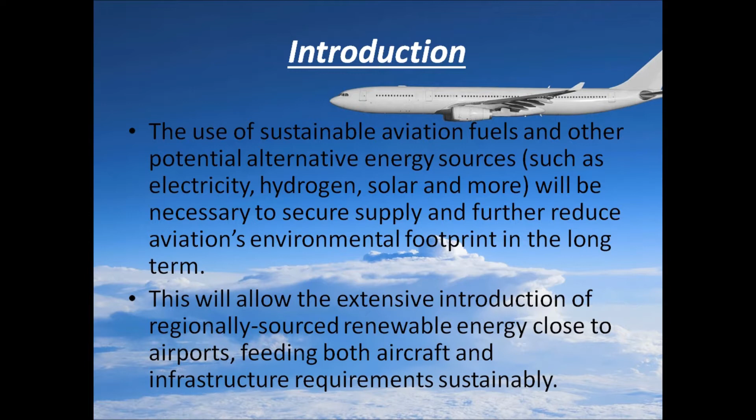A small introduction. The use of sustainable aviation fuels and other potential alternative energy sources such as electricity, hydrogen, solar will be necessary to secure supply and further reduce aviation's environmental footprint in the long term. This will allow the extensive introduction of regionally sourced renewable energy close to airports, feeding both aircraft and infrastructure requirements sustainably. Now let's look at a small video, the history of aviation with energy.

Energy has always been a major concern for aviation, not only for ecological reasons but in order to increase range and reduce cost. Since the 1960s, the commercial airlines have cut their fuel consumption by 70% and also reduced the CO2 emissions. Now that the emissions have become an issue for humanity, the aviation industry is well placed to find solutions. Already a passenger A380 uses just 3 liters per 100 kilometers per passenger, and we can always improve on something that already exists. Future generations of aircraft will save fuel up to the last drop before moving on from fossil fuels.

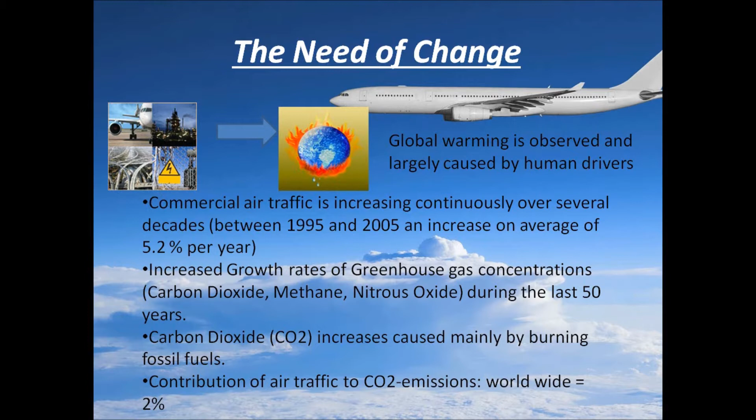The need of change. Global warming is observed, largely caused by human drivers. Commercial air traffic is increasing continuously over several decades. Between 1995 and 2005, an increase on average of 5.2% per year. Increased growth rates of greenhouse gas concentrations CO2, methane, N2O during the last 50 years. Carbon dioxide increase caused mainly by burning fossil fuels. Contribution of air traffic to CO2 emissions worldwide is 2%. Now let's look at a small video explaining about the need of change in the aviation industry.

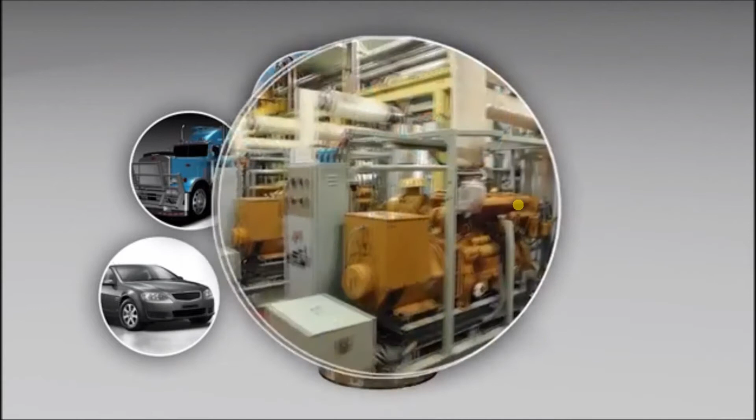The world needs transport fuels. Diesel is used in cars, trucks, heavy machinery and also ships. Diesel is also used in generating electricity in remote places and in factories. Jet fuel is used to power aircraft jet engines. Existing resources of oil and fossil fuels are rapidly decreasing. At current rate of consumption, the world uses 30 billion barrels of oil per annum. Sourcing this oil poses security and environmental challenges. As resources decrease and consumption increases, prices will continue to rise rapidly.

As we have seen in the last video, we need to change from fossil fuels to some biofuels. We need alternatives. So what should be the change? Firstly, reducing fossil fuel dependence. Like most types of transport, the aviation industry depends on fossil fuels. However, fuel supplies are becoming uncertain, more expensive, and cause environmental harm. In the last 40 years, aircraft fuel consumption and emissions have been reduced by 75% as the result of technological advances and positive steps across the aviation sector.

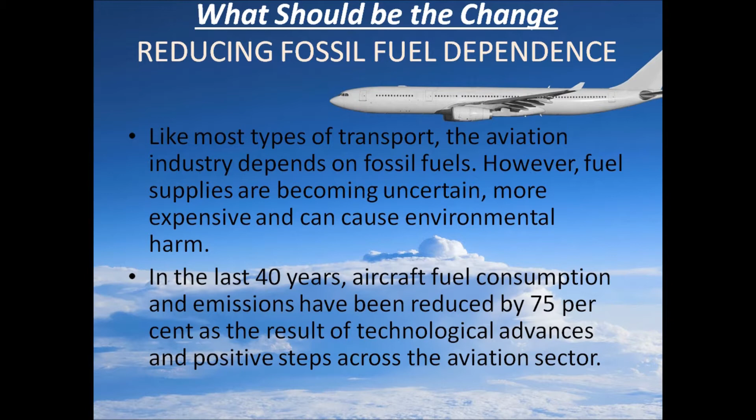Secondly, efficient fuel use. In order to meet the industry's eco-efficiency goals, aircraft manufacturers must ensure every drop of fuel is used efficiently and develop new ecologically sound alternatives. Airlines already are seeing the benefits with jetliners like the double-decker A380, which only produces about 75 grams of CO2 per passenger per kilometer, well below the current and anticipated future international limits. However, there is always room for improvement.

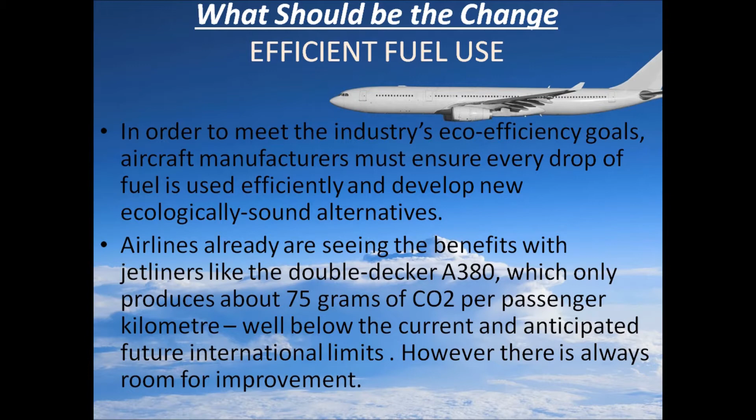Now let us see some energy systems in airplanes. Aircraft power sources. Bleed air power for cabin air conditioning and main engine start. Second, electrical power for lights and cabin entertainment. Third is hydraulic power for flight controls, for the wings to be controlled and the rudder, etc. So where does this power come from? The main power generating units on aircraft are the main engines, which are on the left and right side of the wings. They supply around 1000 kilowatts. They supply hydraulic, bleed air and electrical power for the aircraft.

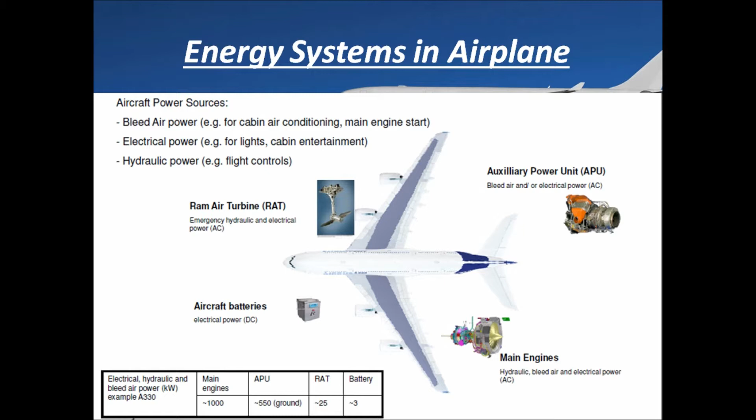The second one is the auxiliary power unit, that is APU, usually used in ground services. It provides around 550 kilowatts. The third one is the ram air turbine, RAT. It is usually used in emergencies, like emergency hydraulic and electrical power. The fourth are the aircraft batteries which supply electrical power. What are the alternative energy sources? First, hydrogen as a fuel. Second, fuel cells. Third, solar power. Fourth, alternative fuels like biofuel.

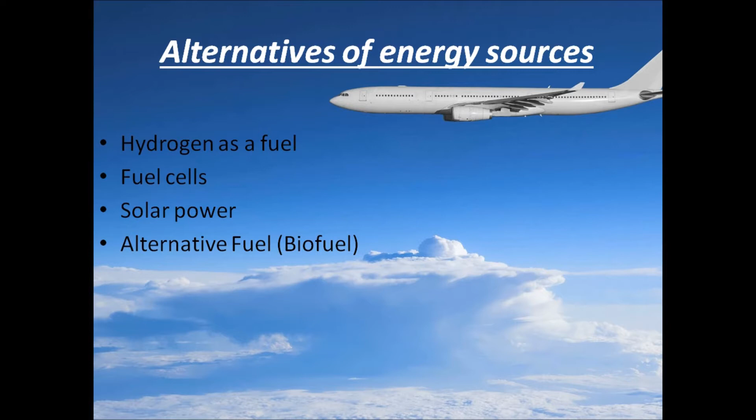Significant improvements in aircraft fuel efficiency are being achieved, 1 to 2% per year, but annual air traffic growth of 5% is leading to an increase in CO2 emissions due to air transportation. This, along with aviation's strong dependency on fossil fuels, is driving research towards development of non-carbon based fuel technologies. Within the fuel cell and hydrogen technology sector, aircraft manufacturers are investigating the potential of PEMFC and solid oxide fuel cell systems to power light aircraft or as APUs on board commercial aircraft.

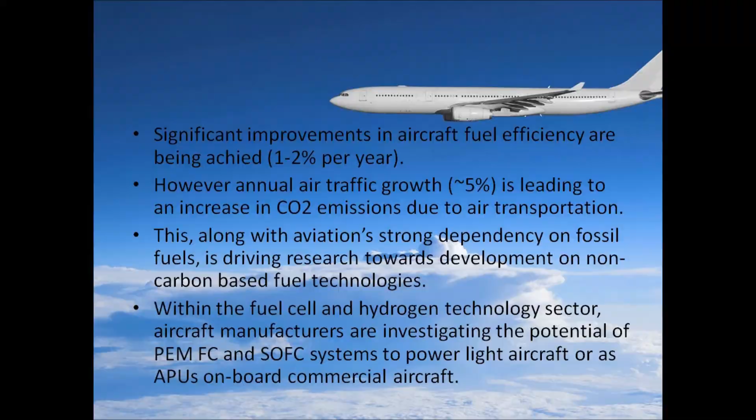Now, hydrogen as a fuel. Hydrogen as a fuel is too bulky. Also, it is not available in pure form on Earth. So a lot of energy will be required to produce it in the pure form.

It is a good option to be thought of, but not in the near future. We know that an aircraft's weight is a major factor because it flies in the air. So storing hydrogen in the fuel tank and carrying it for long distances won't be a good option to be thought of in the near future.

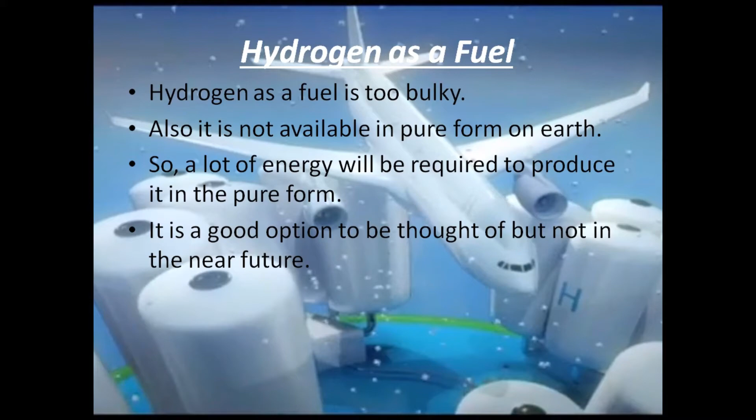The second option is fuel cells. They are really a good option. Now, what are the types of fuel cells? The commonly used fuel cells in aviation are two: PEMFC, that is polymer electrolyte membrane fuel cells, or SOFC, that is solid oxide fuel cells.

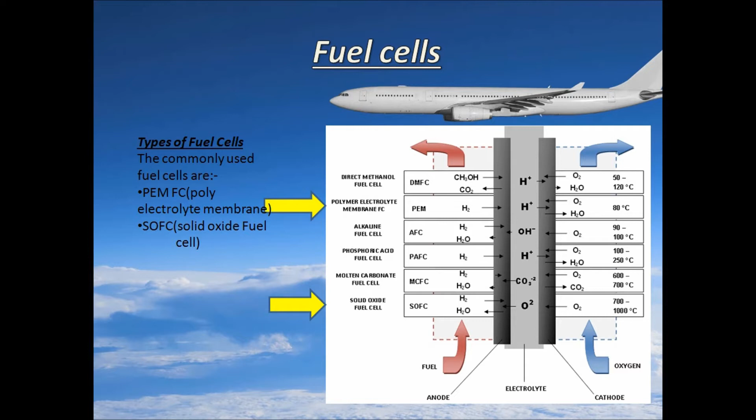How do fuel cells work? Fuel cells require hydrogen and oxygen from air. Then from a cold combustion chemical reaction they produce three things: water, inert gases and, most required, electricity.

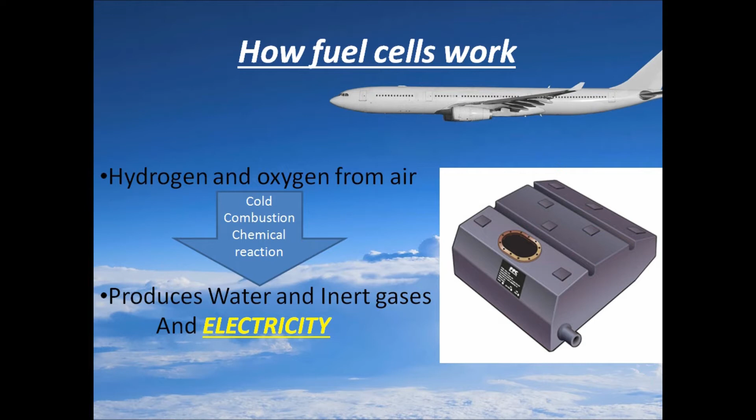Use of fuel cells in aviation. Till today, it is not possible to drive a passenger aircraft only with the help of fuel cells, but surely we can extract the use of fuel cells in small lightweight aircraft and also to power some systems in civil passenger aircraft.

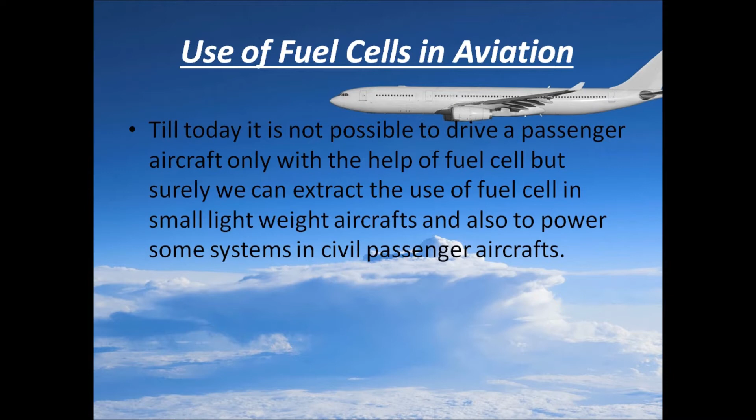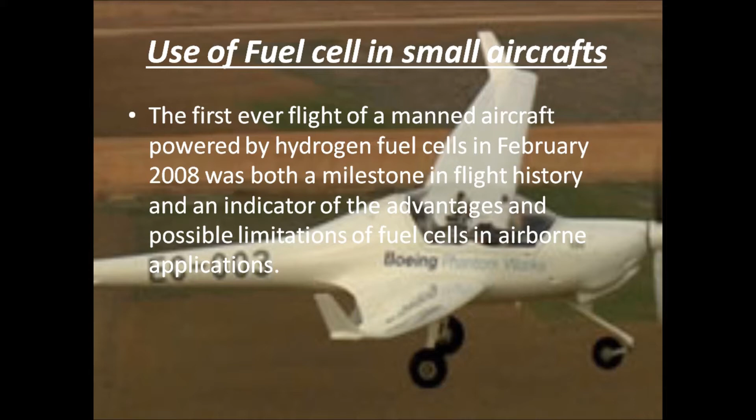Use of fuel cells in small aircraft. As you can see in the background, that is the aircraft which has been flown at 1000 metres from the ground with only the use of fuel cells. This first ever flight of a manned aircraft powered by hydrogen fuel cells in February 2008 was both a milestone in flight history and an indicator of the advantages and possible limitations of fuel cells in airborne applications.

Now let us look at a small video telling about fuel cell technology and its applications.

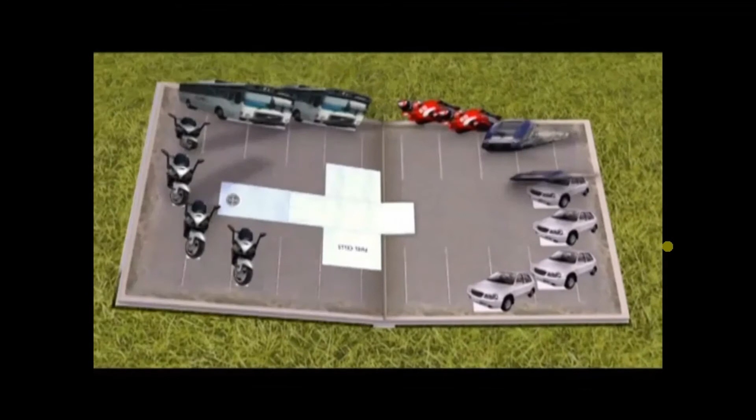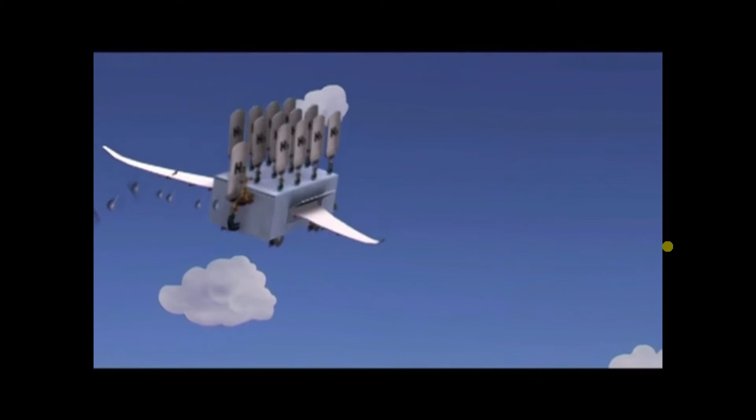Today manufacturers of various transport are interested in fuel cells using hydrogen and oxygen from the air as fuel. A fuel cell produces pure water, inert or inactive gases with no effect on the environment, and electricity. We may dream of flying a very light and silent plane, but for passenger transport we must be down to earth. The major problem here is to produce and stock the huge amount of hydrogen required to drive a fuel cell.

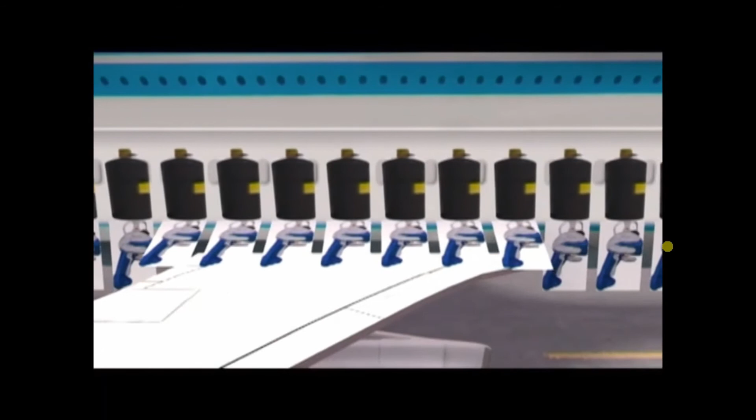But surely we can extract something else from these: fuel cells have been tested to drive the hydraulic system of a passenger aircraft and the test went extremely well. After this, what more can be done to extract the use of fuel cells?

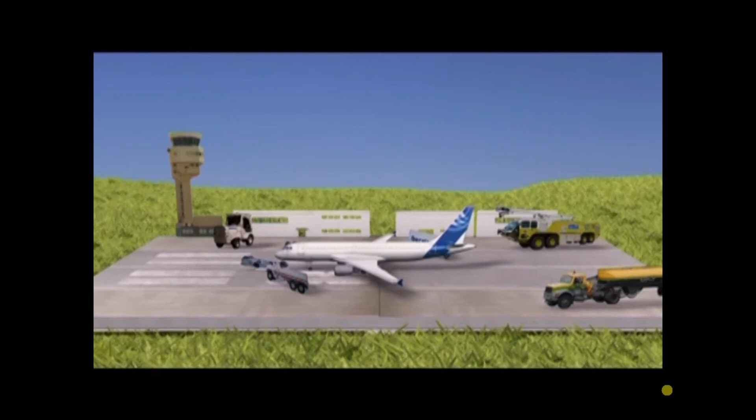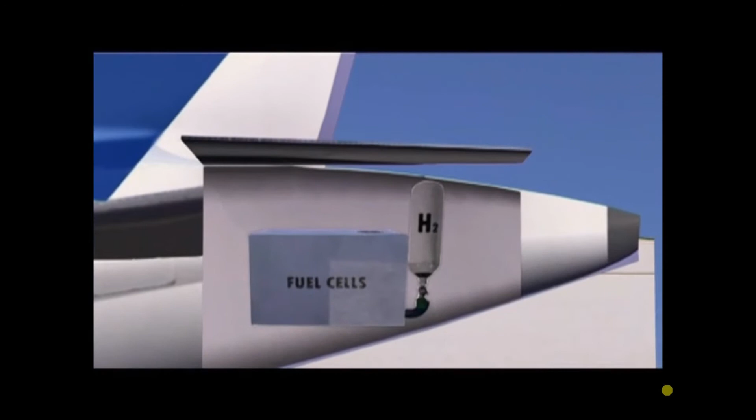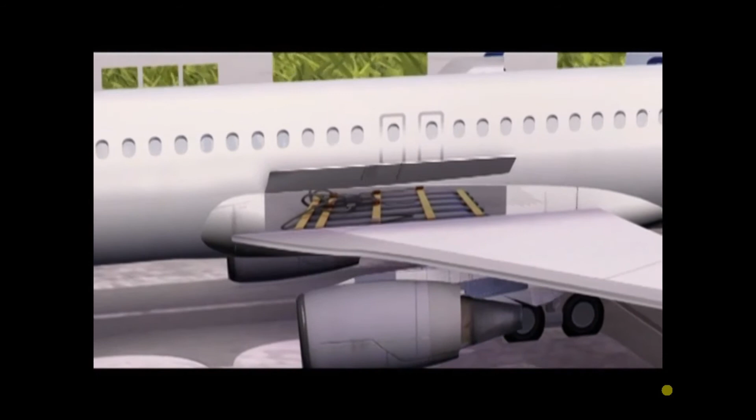We can use it to replace the APU, which uses kerosene and is used for ground operations. This will provide noiseless and emission-free energy on board. The distilled water produced will fill the onboard water tank. The inactive gases produced will be used in fire protection systems in the engines. Ground operation will also be quicker, easier and cleaner. And we also won't need ground generators and water tankers on the ground.

Now let's see one by one the multifunctional uses of fuel cells. First, power provision in the APU, emission-free ground operation. We can also use it for autonomous taxiing, that is for taxiing on the runways. Maintenance bus supply, cargo reloading, electrical main engine start, EECS supply on ground, water generation, that is potable water and

water for toilets and lavatories, heat generation, that is icing prevention or de-icing on the wings, explosion and fire prevention with the help of the inert gases produced by the fuel cells, suppression, inerting of tanks, cargo and e-bay compartment. We can also use it as an electrical wheel drive to drive the nose wheel used in big airplanes.

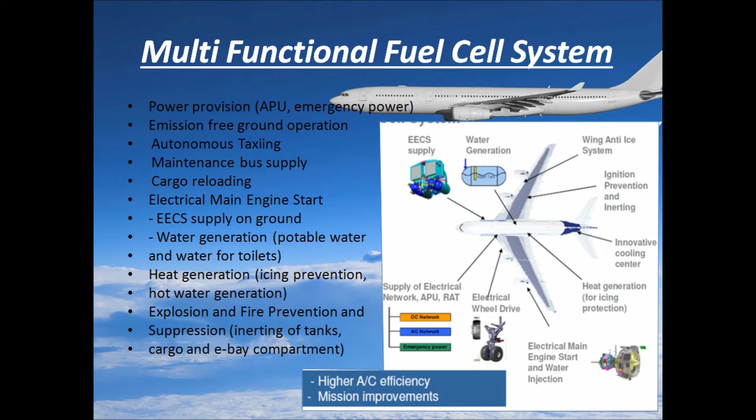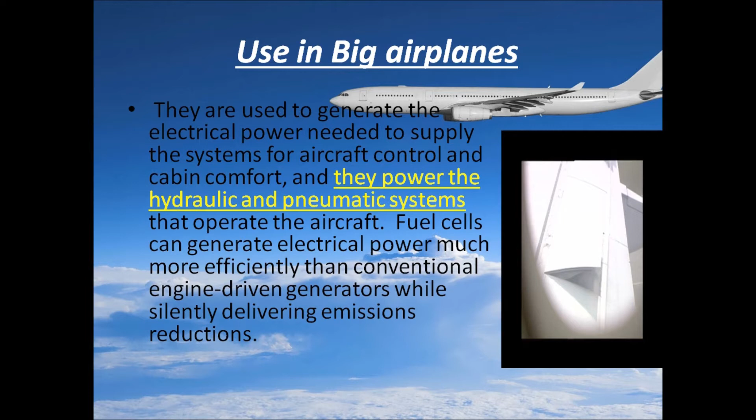As seen in the video, they are used to generate the electrical power needed to supply the systems of aircraft control and cabin comfort, and they power the hydraulic and pneumatic systems that operate the aircraft. Fuel cells can generate electrical power much more efficiently than conventional engine-driven generators.

One of the greatest advantages of using a fuel cell is that the water produced after the reaction can be used in the galleys and lavatories of the aircraft. That reduces the water to be carried during the initial takeoff.

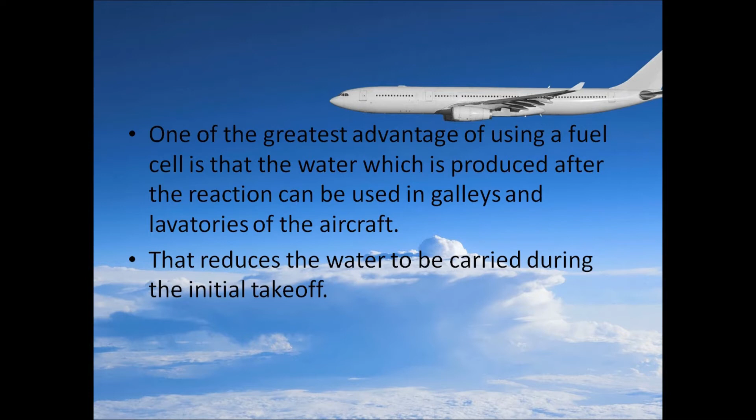Now what are the barriers and drivers for fuel cells? Drivers: they reduce emissions, have quiet operation, low infrared, good for surveillance in UAVs, improved fuel efficiency, weight reduction, and the byproducts produced can be used efficiently, that is water, heat and inert gases.

Now what are the barriers? Technology needs to be proven. Still a lot of research will be needed to prove the technology. Hydrogen infrastructure, that is how to store the hydrogen, how to produce it, how to stock it in the aircraft, is a big barrier. And the third and most important is the high initial cost, which will be a barrier for many aviation companies to install it at the start.

The aircraft industry will not be an early adopter of fuel cell technology. However, given the interest in the technology displayed by two of the world's major aircraft manufacturers, it is likely that fuel cells will appear in aircraft in the future. The most likely applications are hybrid fuel cell APU systems for commercial aircraft, with products appearing around 2020, and specialized military applications for surveillance like in UAVs.

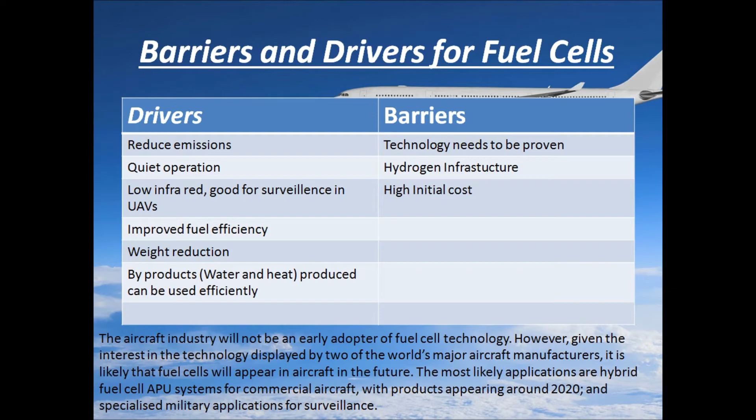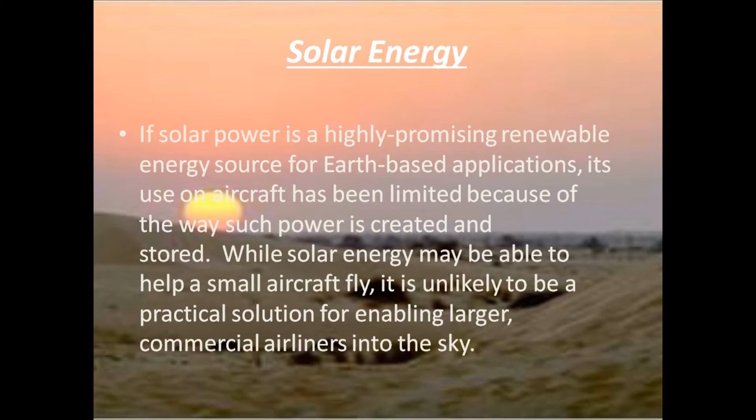Now, how much power can be generated with the help of solar energy? Power is energy upon time, which comes out to be weight upon glide ratio into speed. Weight is, we know, in terms of tons, speed is the average speed of the aircraft, and glide ratio is, when the airplane's engines are stopped, how much it comes vertically down with respect to the horizontal distance covered by it.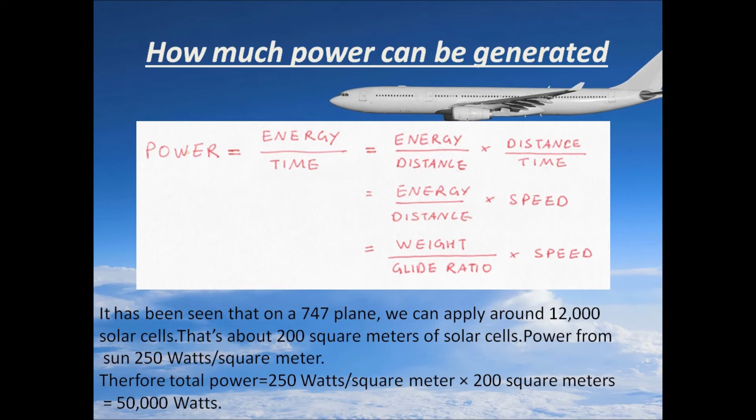It has been seen that on a 747 plane we can apply around 12,000 solar cells on its wings. That's about 200 square meters of solar cells. Power from the sun is 250 watts per square meter. Therefore, total power which can be attained on a 747 plane comes out to be 50,000 watts.

The best commercially available solar cells are about 20% efficient at capturing solar power, and then there are further losses in the batteries and the electrical motors, so total efficiency comes down to 12% only. So the power obtained is 6000 watts. A 747 has a glide ratio of around 12.

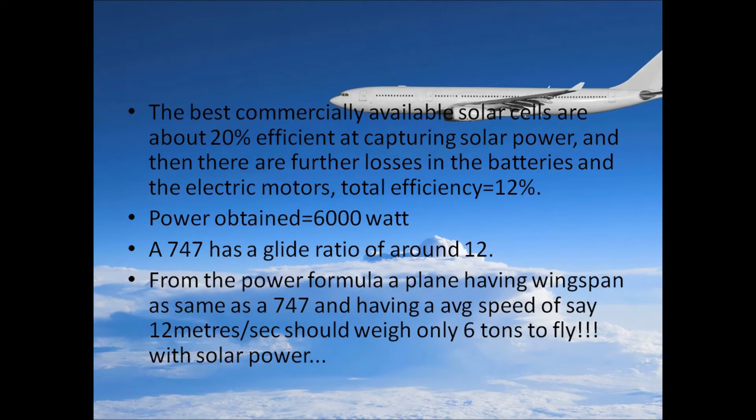From the power formula, a plane having the same wingspan as a 747 and an average speed of, say, 12 meters per second should weigh only 6 tons to fly with solar power. 6 tons is a very small weight, so it is not feasible to apply solar cells and fly a commercial civil passenger airline plane, but we can use it for something else.

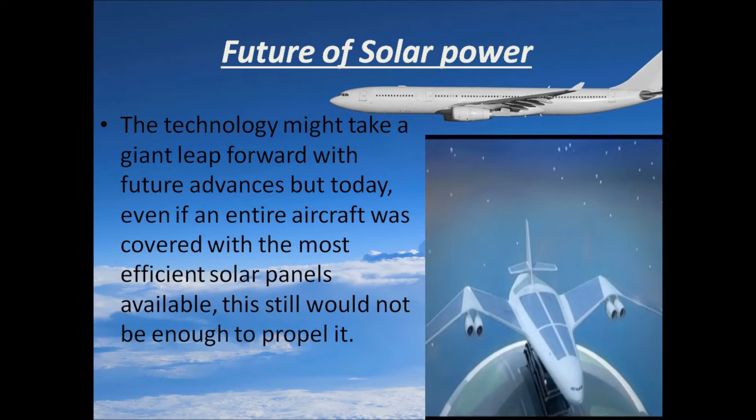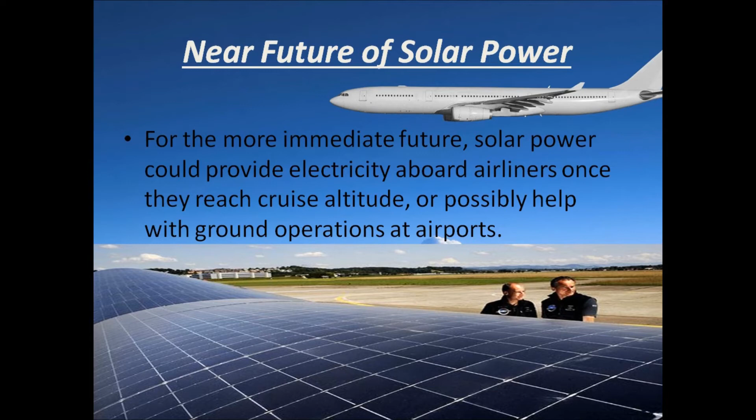So what is the future of solar power? The technology might take a giant leap forward with future advances, but today, even if an entire aircraft was covered with the most efficient solar panels available, this still would not be enough to propel it, but it can be used for something else. For the more immediate future, solar power could provide electricity on board airliners once they reach cruising altitude, or possibly help with ground operations at airports.

Let's look at the fourth alternative, that is alternative fuels. It is one of the most important, since everyone is concerned about reducing fuel consumption. Now, the industry is exploring reliable alternatives to conventional jet fuel that are sustainable and have a smaller carbon footprint.

Now, what are the main requirements for sustainable alternative jet fuels? Firstly, it should be able to mix with conventional jet fuel, use the same supply infrastructure and not require adaptation of aircraft or engines. That is, it should not require changing the engine infrastructure, etc. It should meet the same specification as conventional jet fuel, in particular resistance to cold and high energy content.

It should meet sustainability criteria such as life cycle carbon reductions, limited fresh water requirements, no competition with food production, and no deforestation. Automotive bioethanol and biodiesel are not suitable for jet fuel.

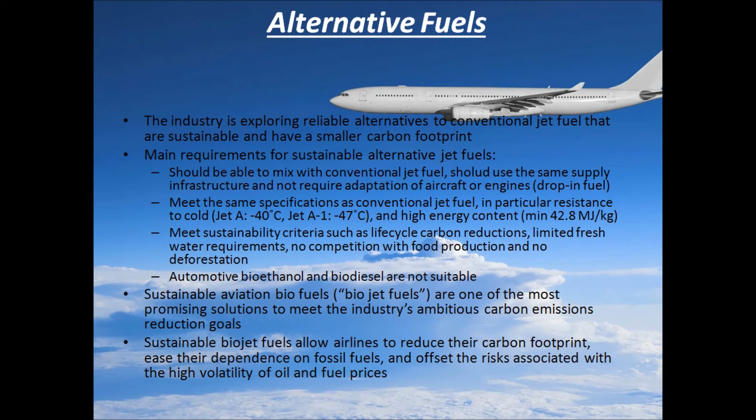Sustainable aviation biofuels are one of the most promising solutions to meet the industry's ambitious carbon emissions reduction goals. Sustainable biojet fuels also allow airlines to reduce their carbon footprint, ease their dependence on fossil fuel, and offset the risk associated with high volatility of oil and fuel prices.

Sustainable sources of biomass. Now, what are the sources? Biofuels should only be made from sustainable non-food biomass sources. Some examples include camelina, an energy crop that grows in rotation with wheat and other cereal crops. Halophytes thrive in salty regions where little else grows. Jatropha can be grown on degraded lands and is resistant to drought. Switchgrass grows quickly, needs little water and produces a high yield of biomass.

Used cooking oil can be easily collected and recycled. Agricultural and forestry byproducts yield valuable biomass without requiring dedicated land. Municipal waste contains biomass and can be diverted from landfills. Now, the most important, algae. Algae are simple photosynthetic organisms. They can be grown in polluted or salt water, and can produce up to 250 times more oil per unit area than soybeans.

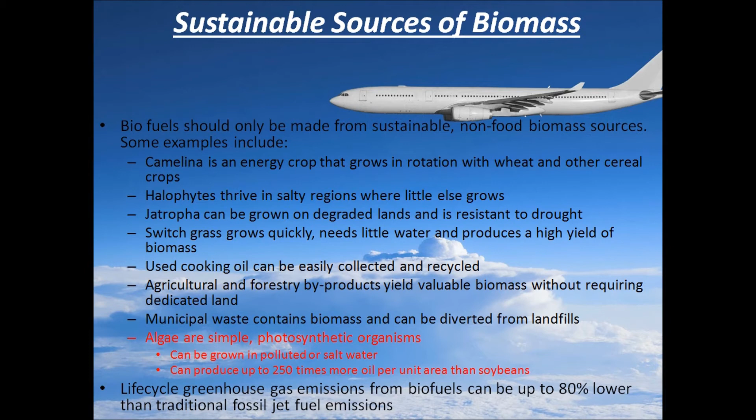The value chain is the whole process from selecting a feedstock to the burning of the fuel in the aircraft. First, we need to select the feedstock according to the requirement and the area where we want to grow it. Then the feedstock growth. It will be grown on land or in water, whatever is feasible. Then the harvesting of the feedstock. Then the feedstock needs to be transported to an area where it would be refined and converted into biofuel.

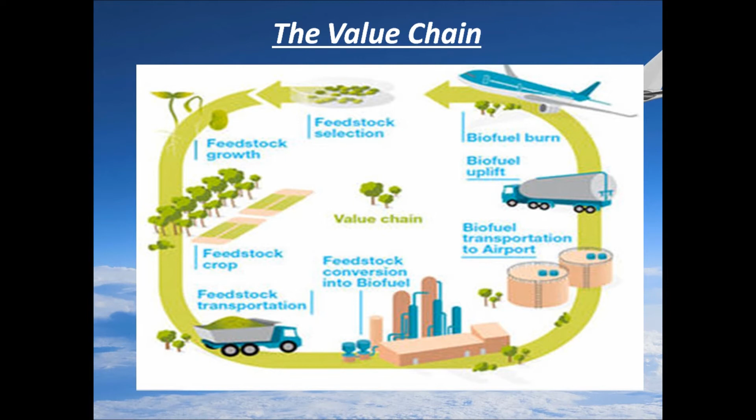This biofuel produced will be taken to the nearby airport to store and stock it. Then from the airport we need to fill the biofuel in the tankers, and this biofuel will be filled in the tanks of the aircraft, and it will be used to produce power.

Now let us see, if we use algae as a feedstock, what are the requisites for producing biomass from algae? Firstly, the sun, CO2, nutrients. With these, algae produce biomass.

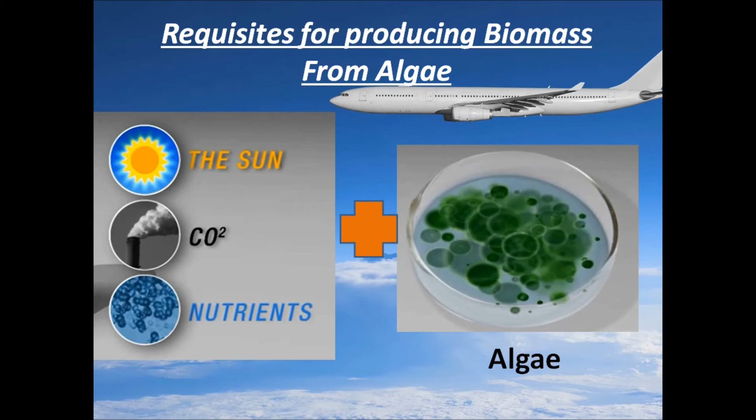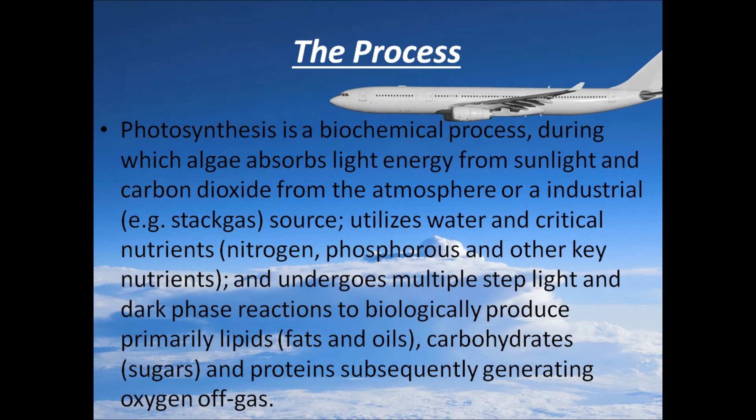The process. Photosynthesis is a biochemical process during which algae absorbs light energy from sunlight and carbon dioxide from the atmosphere or an industrial source, utilizes water and critical nutrients like nitrogen and phosphorus, and undergoes multiple step light and dark phase reactions to biologically produce primarily lipids, fats and oils, carbohydrates and proteins, subsequently generating oxygen off gas.

Algae production basically includes the sourcing of carbon dioxide, water, nutrients and light energy to a photosynthesis system for conversion to algae of a specific composition. Carbon dioxide source. There are a number of potential carbon dioxide stack gas sources with high CO2 concentration preferable for algae production, including power plants and energy intensive manufacturing facilities.

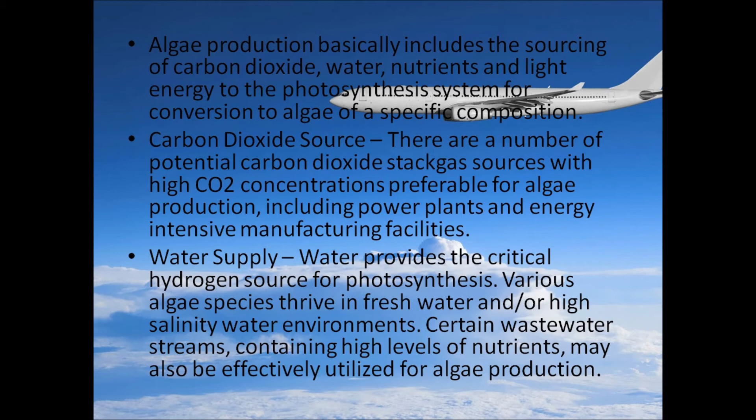Water supply. Water provides the critical hydrogen source for photosynthesis. Various algae species thrive in freshwater or high salinity water environments. Certain wastewater streams containing high levels of nutrients may also be effectively utilized for algae production. Nutrient source. The primary nutrients required for the photosynthesis include nitrogen and phosphorus, sourced from conventional nitrogen phosphorus fertilizers.

Light energy. Sunlight provides the main energy source for conversion of CO2 and water into algae, generally 70 to 85% of the total energy requirements. Only the visible light portion of sunlight is useful for algae production, and more specifically, certain wavelengths are more efficiently absorbed.

Now the algae composition. The composition of the algae product is highly dependent on the specific species utilized and the photosynthesis operating conditions employed. Algae products contain from 45% up to 80% carbon content in the form of lipids or oils, carbohydrates, proteins, and hydrocarbons. Now let us look at a video telling about the production of algae and the process of making biojet fuels.

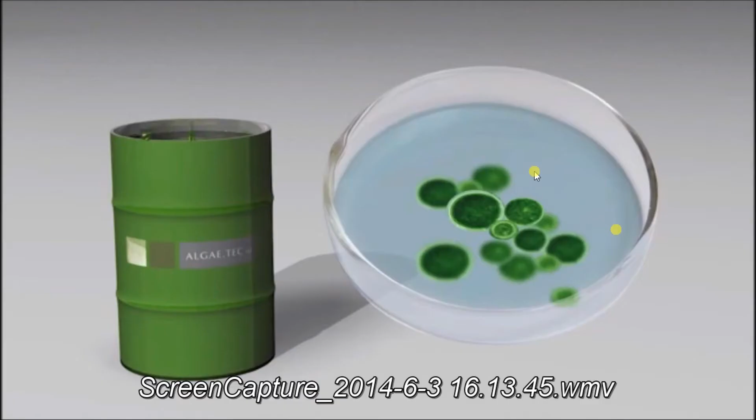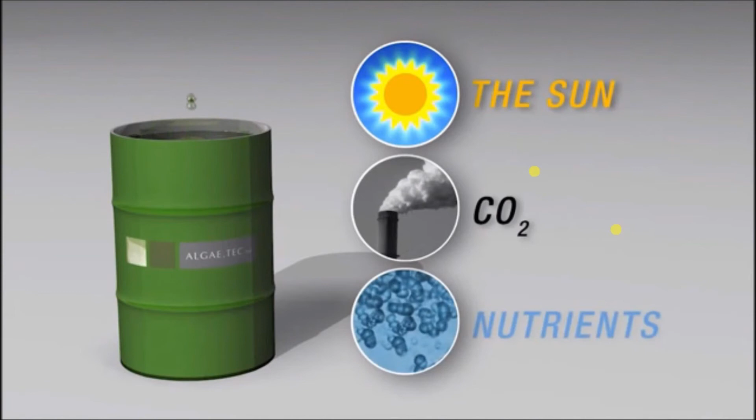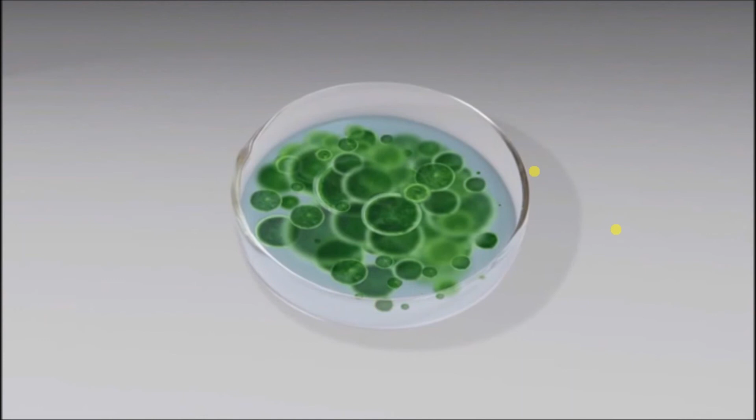An alternative viable source of oil is from an industrial scale high yield growth system using algae. Algae uses the sun, carbon dioxide and nutrients to grow. In a controlled environment, algae can multiply many times each day. Selected algae can produce 50% oil and 50% biomass, which converts to fuel products. This makes algae one of the world's valuable, renewable, and sustainable fuel resources.

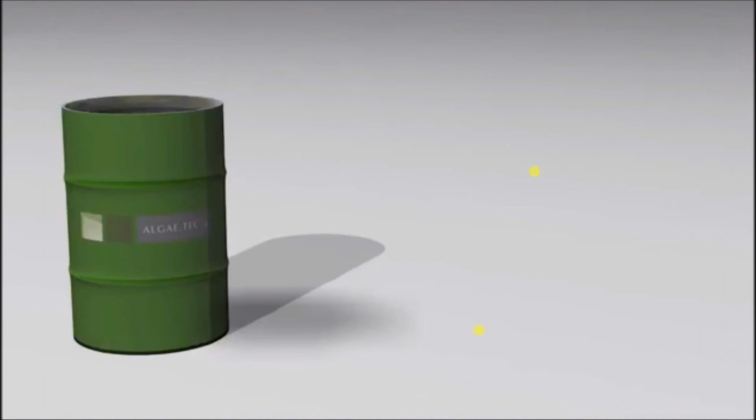A look inside the technology shows how light, carbon dioxide, and nutrients deliver a powerful algae growth mix in controlled and closed photobioreactors. The resulting algae is made up of valuable oil, sugar, proteins, and biomass. The algae is separated into oil and biomass. The products are separated to produce biodiesel, jet fuel, and ethanol.

And the alternative fuels in practice which have been used and tested. Between 2008 and 2011, at least 10 airlines and several aircraft manufacturers performed flight tests with various blends containing up to 50% biojet fuel, and the remaining 50% was the original jet fuel which is used in the daily process. These tests demonstrated that biojet fuel was technically sound, and the following observations were made.

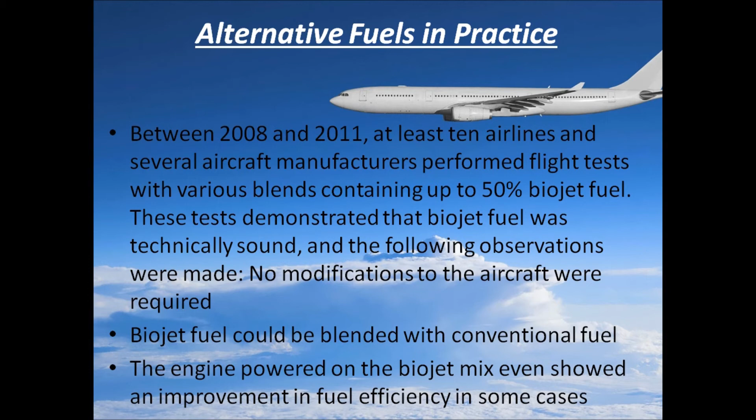No modification to the aircraft was required. Biojet fuel could be blended with conventional fuel. The engine powered on the biojet mix even showed an improvement in fuel efficiency in some cases. The production and impact on net emissions.

The main challenges to a wide deployment of biojet fuels are not technical but commercial and political. Currently, biojet fuels are significantly more expensive than Jet A or A1. Therefore, demand is low and risk is high for investment in production infrastructure. Carefully designed policy is needed to foster investment and development of biojet production capacity.

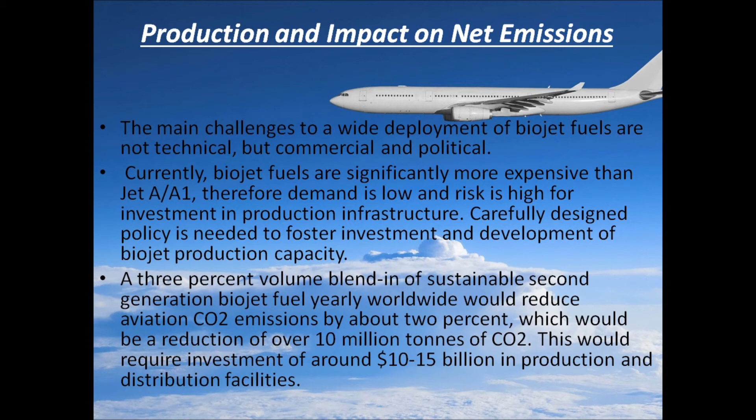A 3% volume blend in of sustainable second generation biojet fuel yearly worldwide would reduce aviation CO2 emissions by about 2%, which would be a reduction of over 10 million tons of CO2. This would require investment of around 10 to 15 billion in production and distribution facilities. The 5 easy steps to growing a viable aviation biofuel industry.

Many of the technical hurdles facing aviation in its move towards sustainable aviation biofuel have now been overcome, and most of this work has been achieved within the industry. Now commercialization and scaling up of the supply of aviation biofuel is the most important task. Now this all has to be done by government. The role of government in these five steps: first step, foster research into new feedstock sources and refining processes.

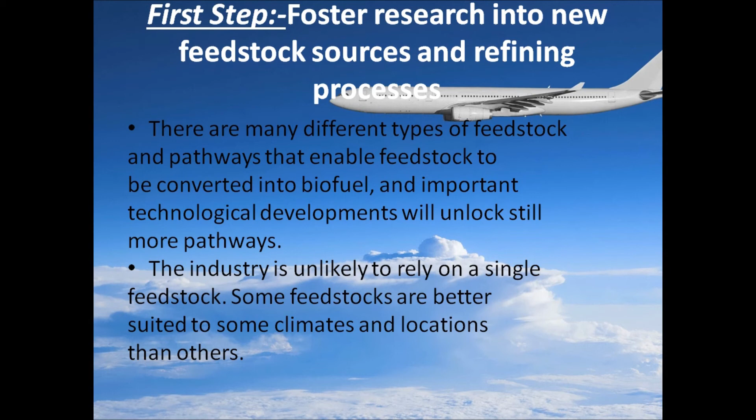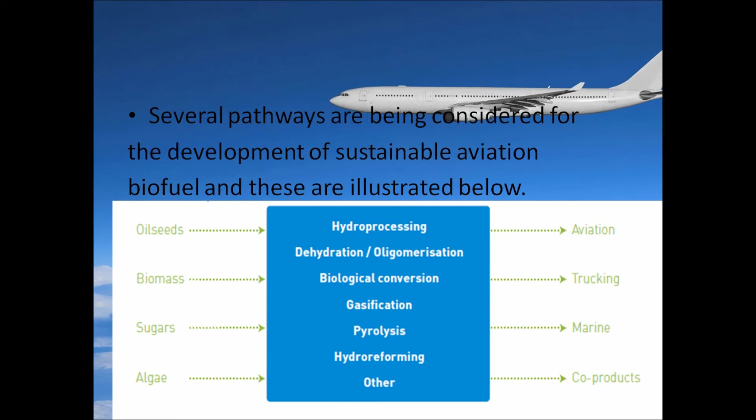That is, new feedstock sources need to be developed. There are many different types of feedstocks and pathways that enable feedstock to be converted into biofuel, and important technological developments will unlock still more pathways. The industry is unlikely to rely on a single feedstock. Some feedstocks are better suited to some climates and locations than others. Several pathways are being considered for the development of sustainable aviation biofuel, and these are illustrated below. Here below are shown some pathways which can be used to select the feedstock.

The second step, de-risk public and private investments in aviation biofuels. These incremental upfront capital investment costs are a potential barrier to commercialization. In this context, governments can play a role in reducing this risk through measures such as loan guarantees, tax incentives, grants, and co-financing for pilot and demonstration projects. They can also provide a level playing field with biodiesel by providing similar fiscal and price incentives in order to catalyze establishment of the sector.

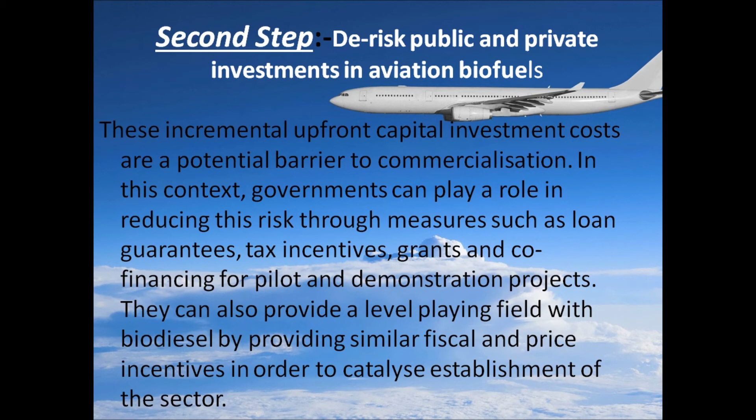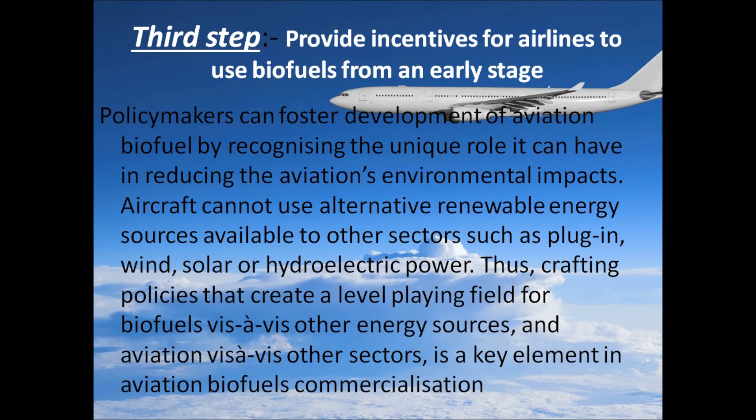Third step, provide incentives for airlines to use biofuels from an early stage. Policymakers can foster development of aviation biofuel by recognizing the unique role it can have in reducing aviation's environmental impacts. Aircraft cannot use alternative renewable energy sources available to other sectors such as plug-in wind, solar or hydroelectric power. Thus, crafting policies that create a level playing field for biofuels with other energy sources, and aviation with other sectors, is a key element in aviation biofuel commercialization.

Fourth step, encourage stakeholders to commit to robust international sustainability criteria. The development of an accepted set of globally harmonized standards will help ensure that investment is directed at biofuels that meet acceptable sustainability criteria, thus minimizing this form of risk.

Criteria need to be mutually recognized around the world. For aviation, global standards are needed wherever possible, due to operational routing of aircraft, common ground equipment, and worldwide fuel purchasing requirements.

Fifth step, establish coalitions encompassing all parts of the supply chain. Those seeking to better understand potentials for this industry should engage with the process identified in this publication to understand next steps in each region.

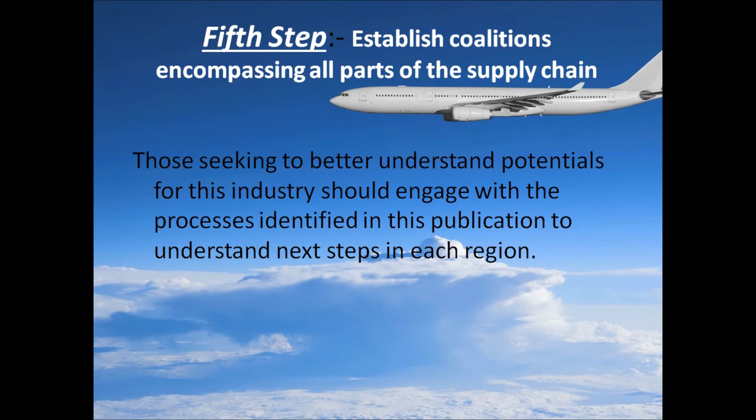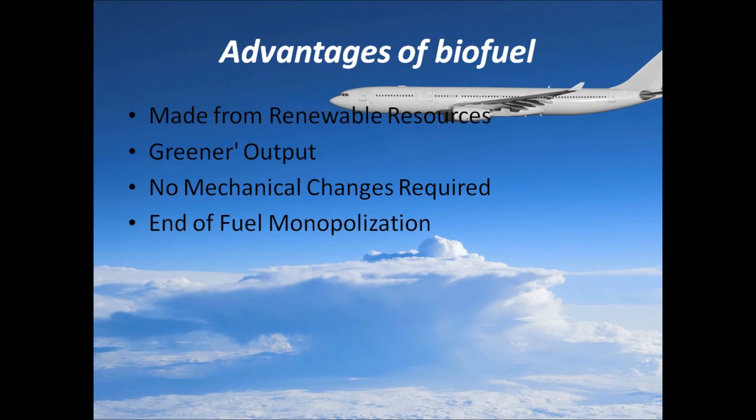Advantages of biofuel: made with renewable resources, greener output, no mechanical changes required, end of fuel monopolization. Disadvantages of biofuel: energy output. Biofuels have a lower energy output than traditional fuels. Food shortage may become an issue with biofuel use.

High cost. To refine biofuels to more efficient energy outputs and to build the necessary manufacturing plants, the cost is a major problem. Water use. Massive quantities of water are required for proper irrigation of biofuel crops.

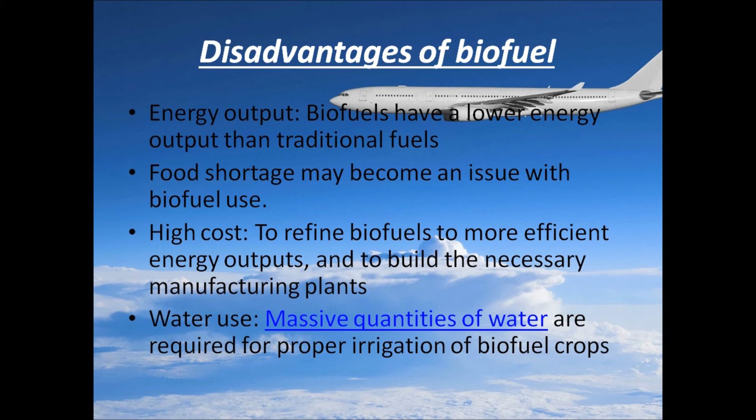Now let us look at a new concept, that is smarter skies, for the saving of energy and CO2 reduction. The future of aviation concentrates on just that, and the Smarter Skies vision consists of three concepts which could be implemented across all the stages of an aircraft's operation to reduce waste in the system, waste in time, waste in fuel, and reduction of CO2, and would lead us to energy efficient aviation infrastructure.

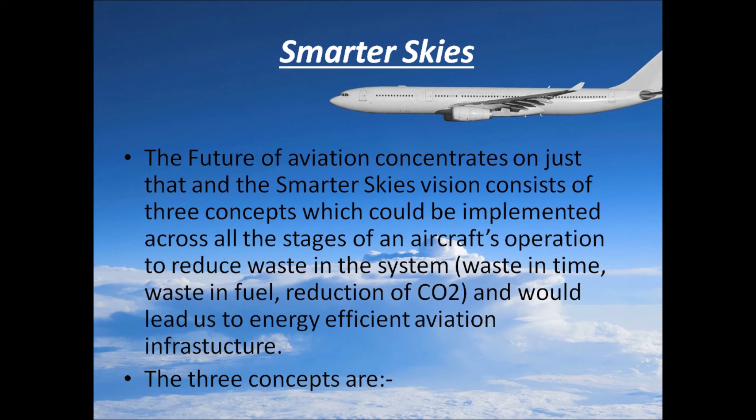The three concepts are: first is eco-climb. Aircraft launched through assisted takeoffs using renewably powered propelled acceleration will allow for steeper climb from airports to minimize noise and reach efficient cruise altitudes more quickly.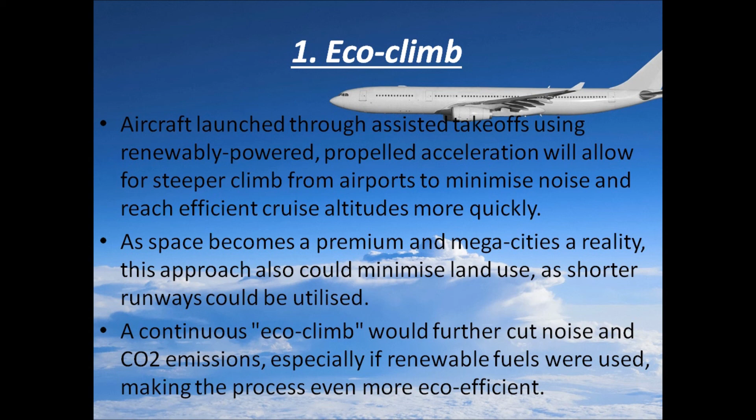As space becomes a premium and megacities a reality, this approach will also minimize land use as shorter runways can be utilized. A continuous eco-climb would further cut noise and CO2 emissions, especially if renewable fuels were used, making the process even more eco-efficient.

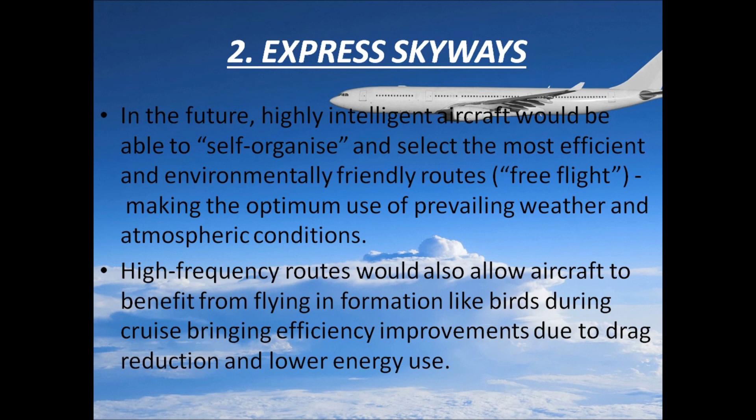Second, express skyways. In the future, highly intelligent aircraft would be able to self-organize and select the most efficient and environmentally friendly routes, making the optimum use of prevailing weather and atmospheric conditions. High frequency routes would also allow aircraft to benefit from flying in formation like birds during cruise, bringing efficiency improvements due to drag reduction and lower energy use.

In a V formation of 25 birds, each can achieve a reduction of induced drag by up to 65% and increase the range by 7%. While efficiencies for commercial aircraft are not as great, they remain significant. As we can see in the figure, on the right side, a flock of birds forming the V formation, and on the left side, the concept airplane trying to form a V shape.

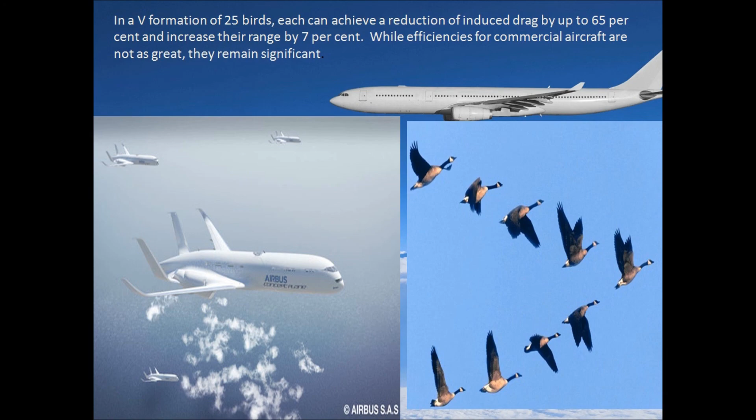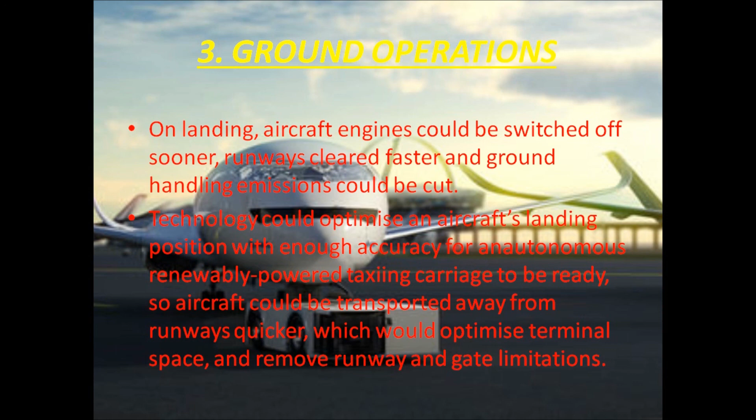Third, ground operations. On landing, aircraft engines could be switched off sooner, runways cleared faster, and ground handling emissions could be cut. Technology could optimize an aircraft landing position with enough accuracy for an autonomous, renewable powered taxiing carriage to be ready, so aircraft could be transported away from runways quicker, which would optimize terminal space and remove runway and gate limitations. Now let us look at a small video which will explain the working of the smarter skies.

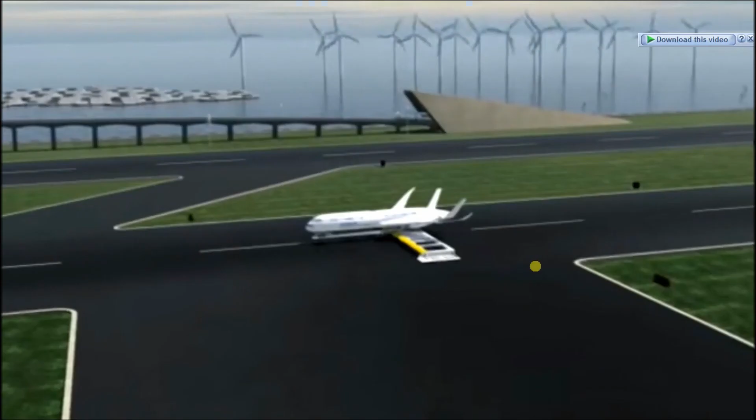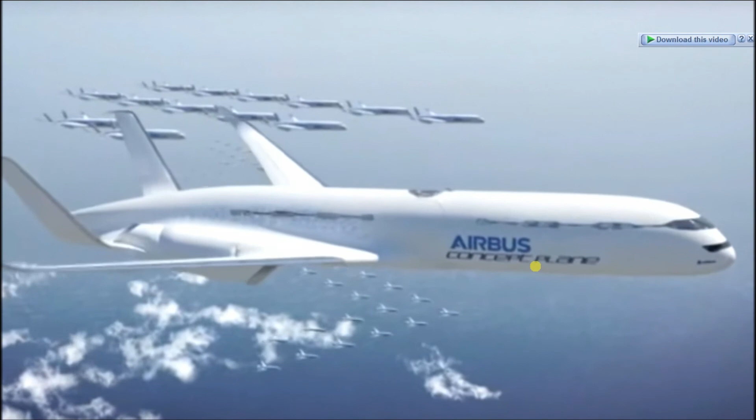They could self-select the efficient route rather than today's zigzag flight patterns, flocking like birds in formation to reduce drag, increase fuel efficiency and minimize emissions. They could pinpoint landing positions before entering the airport, gliding their way towards the runway with their engines in the idle position. The kinetic energy captured at landing might power onboard systems during taxiing.

I hereby conclude the presentation by saying that in the near future biofuel and fuel cell technology will be used at a vast scale, but a lot more research into it is needed. It is very important to look at more alternatives for fossil fuels since they are depleting at a very high rate. Also, the aviation industry has been successful in bringing fuel consumption and CO2 emissions down by a great amount in the last few decades.

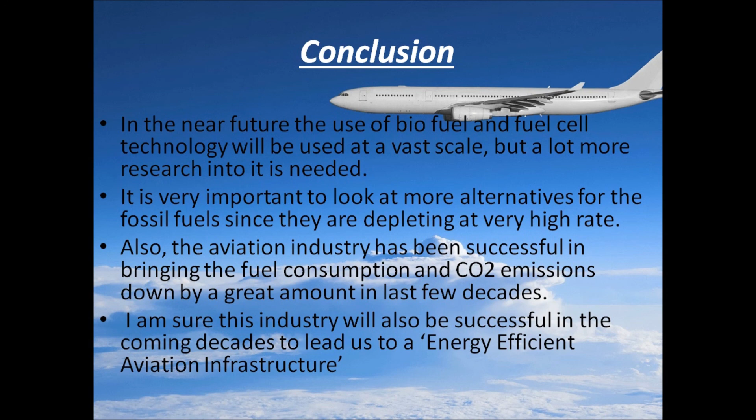I am sure this industry will also be successful in the coming decades to lead us to an energy efficient aviation infrastructure. Thank you.